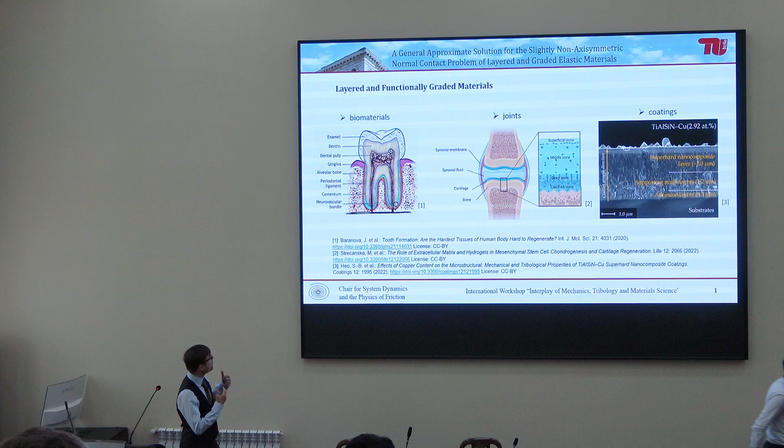So what do I want to speak about? Well, lots of materials aren't homogeneous for various tribological reasons. We put coatings to improve wear and friction properties. Nature designs materials almost exclusively in an inhomogeneous way because it's better mechanically and tribologically, and nature found that out a lot earlier than we did. So in teeth or in joints, basically any biomaterial is inhomogeneous—either layered or functionally graded. So what do we do with that?

We can do contact mechanics for these materials too. It's slightly more complicated, but we can do it.

I will now start with some fundamentals that Professor Popov skipped yesterday, because I have the time, and because I want to say a bit less than he told you yesterday.

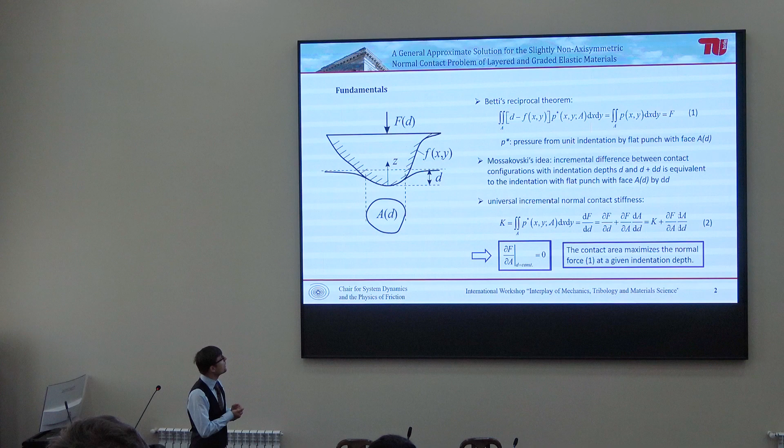When we look at some contact problem, it actually doesn't matter whether the material is homogeneous or inhomogeneous. It's just a linear elastic medium, and we indent it by some rigid body, and we will have some contact area. The interesting thing is that due to reciprocity by Maxwell and Betti, we can compare two contact problems with each other. The first is this convex, arbitrarily formed indenter, and the second is indentation by a flat punch with that same face.

So we have some contact area at this instant of the indentation—contact area A. Now we make a flat punch with exactly this face and indent that flat punch. It will have the same contact area because it's a flat punch, and if we press the flat punch, the contact area is always known. The pressure distribution in this second, imagined problem is P star. The pressure distribution in the real problem we want to solve is P. Due to reciprocity, we can calculate these integrals where we multiply the displacement times the pressure.

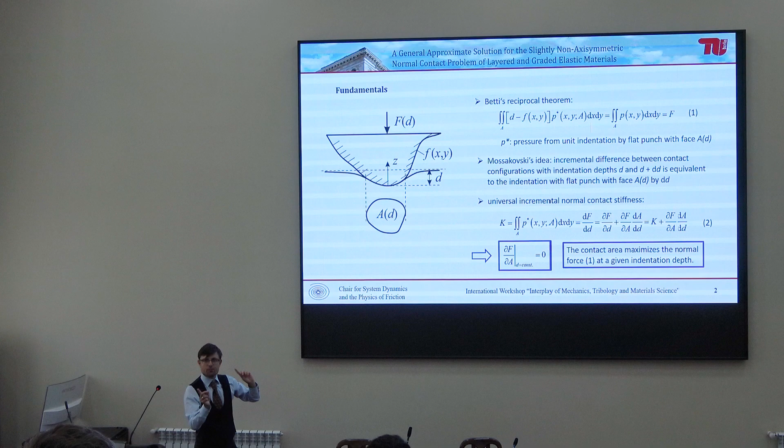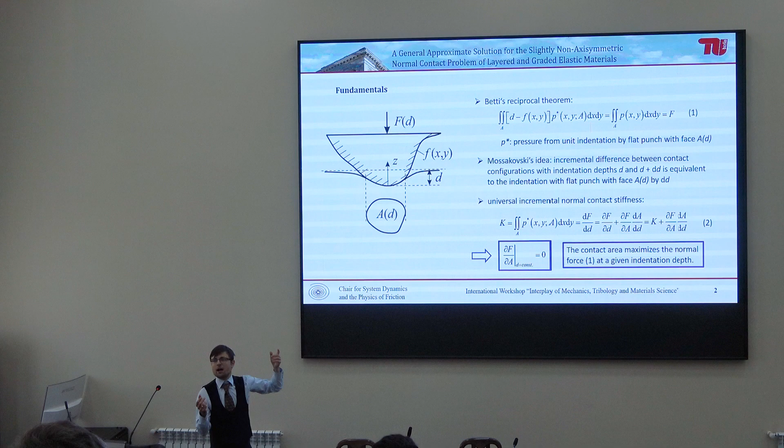If we integrate that, we get some energy functional, and due to reciprocity by Maxwell, these integrals on both sides must be the same. The displacements for the flat punch are constant because we indent it, and the displacement is always unity because we define the pressure distribution like that. So on the right side we just have the force, and on the left side we have some functional with the displacements in that problem and the pressure distribution P star from the indentation by the flat punch.

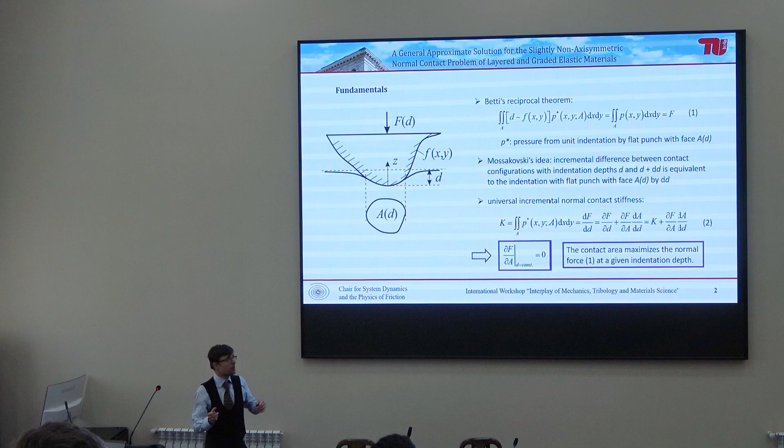So now there are some problems. First, we don't know P star because it's an arbitrary shape of the contact area, and we don't know the pressure that corresponds to it. But what do we know?

We know from Mossakovski, long ago, or as Professor Popov credited it yesterday to Jaeger—though actually the idea is older, Jaeger formulated it in a very elegant and capturable way. The idea is the following: we can understand the indentation process as one during which the contact area grows in some way.

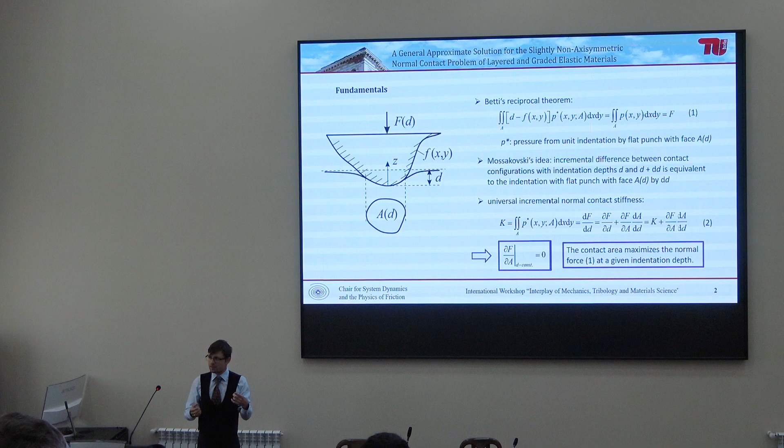We can understand it as a series of flat punch indentations with growing flat punches. And so the incremental stiffness at this instant for this problem on the left side with this contact area A, this incremental stiffness must be the same as the stiffness of the flat punch problem with this contact area. That stiffness is only the force for unit indentation.

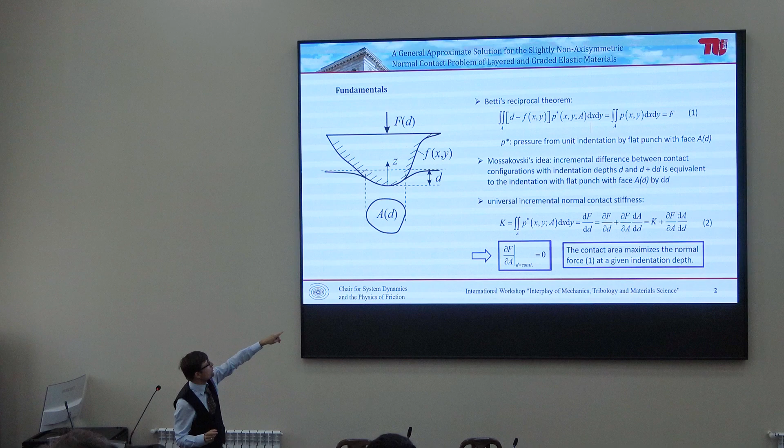So that is just the integral over P star, over the contact area. So this is the incremental stiffness K. But if we look at Betti's theorem, and we calculate the stiffness from there by building the derivative of the force with respect to the indentation depth, the total derivative, then we have the partial derivative and the chain rule. And the partial derivative of the force with respect to the indentation depth also is just K.

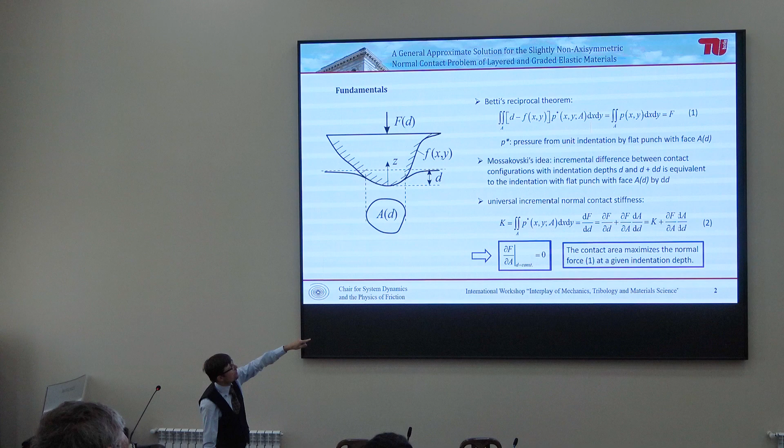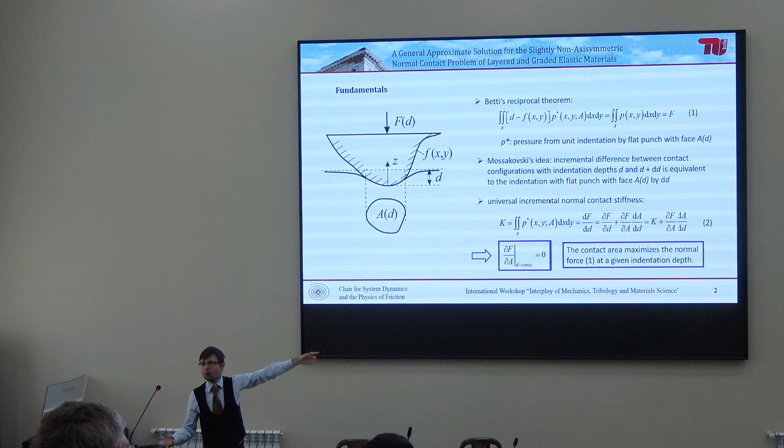And that means, if we look carefully, that the second term on the right side of equation 2, this partial derivative of F with respect to the contact area, this always must be 0. Because we have K on the left side and we have some K plus something, so this something must be 0. So, and that's the very important part.

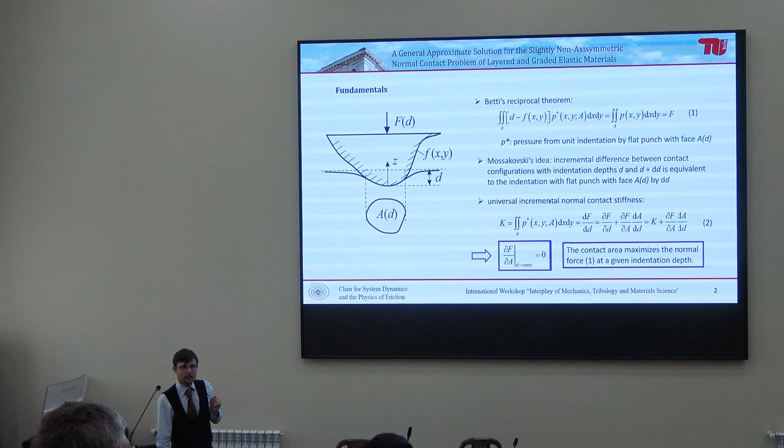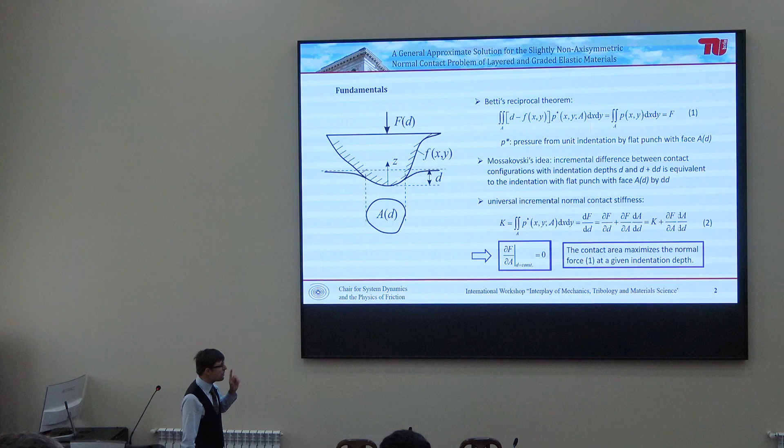What does it mean? It means that the correct contact area in any linear contact problem will always maximize the normal force at a given indentation depth. And that is very, very useful because it's the extremal principle of contact mechanics.

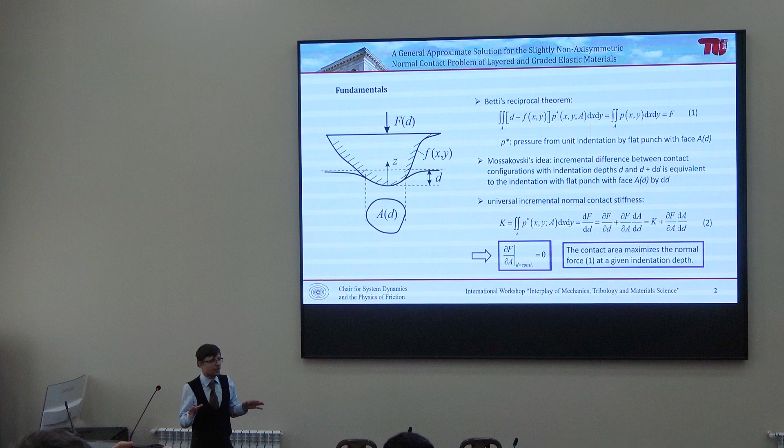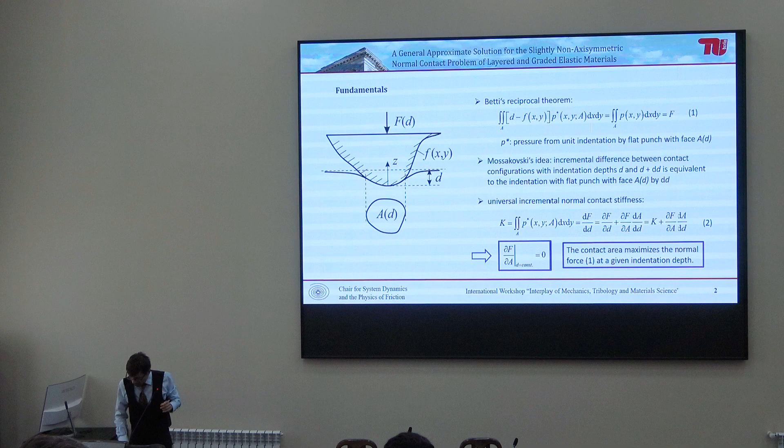We have extremal principles almost anywhere in mechanics, but mostly these principles are energy principles. That's a force principle. But that is the most relevant extremal principle of contact mechanics, from which we will derive a lot of stuff. So, we have to start with the flat punch.

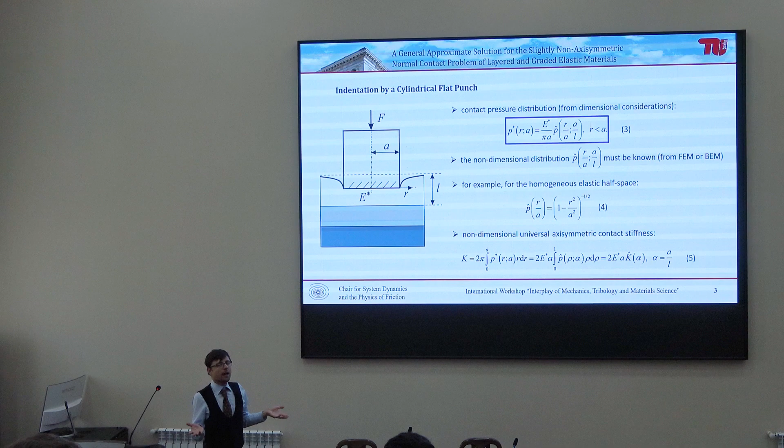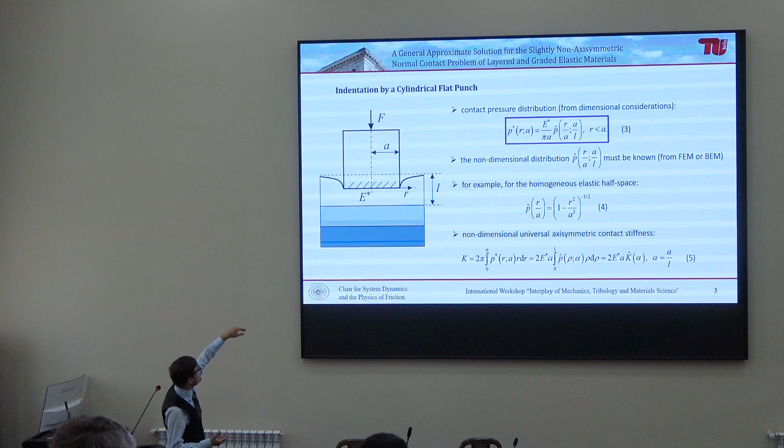And we will start with the most trivial problem, the cylindrical flat punch. And then we build up and up and up from here. So we have some inhomogeneous, for example, layered elastic material, and we indent it by a cylindrical flat punch.

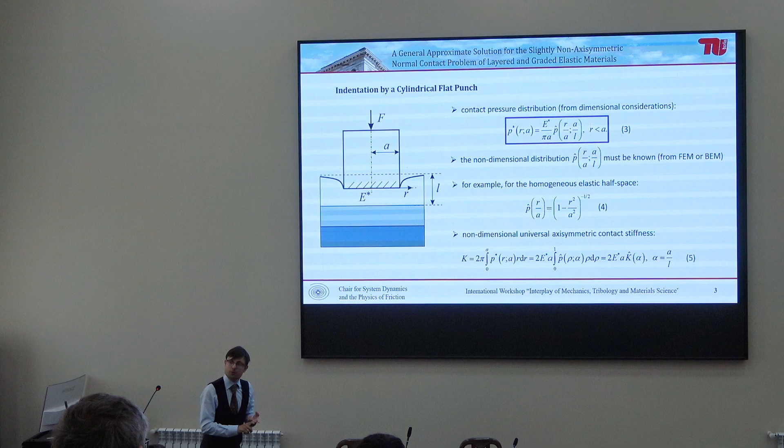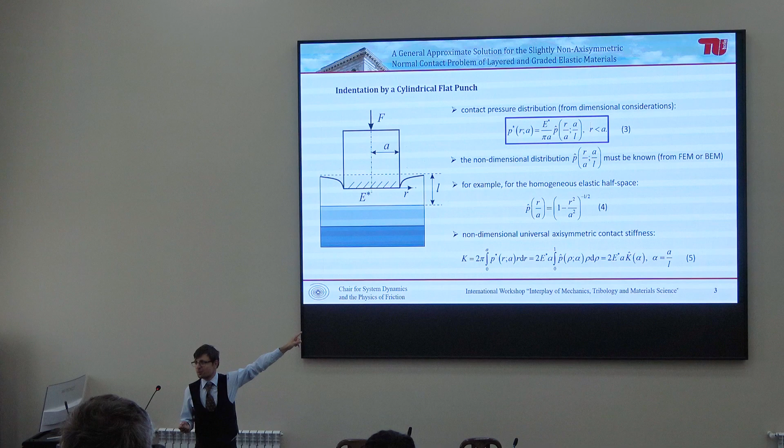And there will be some pressure distribution. This pressure distribution must be calculated somehow, either by finite elements or boundary elements. It doesn't matter, but we have to get it from somewhere. And the aesthetics and harmony of the homogeneous problem that Professor Popov told you yesterday about arises from the fact that for the homogeneous case, we know this pressure distribution in an exact form.

But generally, we don't know it. And generally, it's not even possible to calculate it analytically. But of course, it's always possible to calculate it numerically by some formalism. We have to put it that we know that.

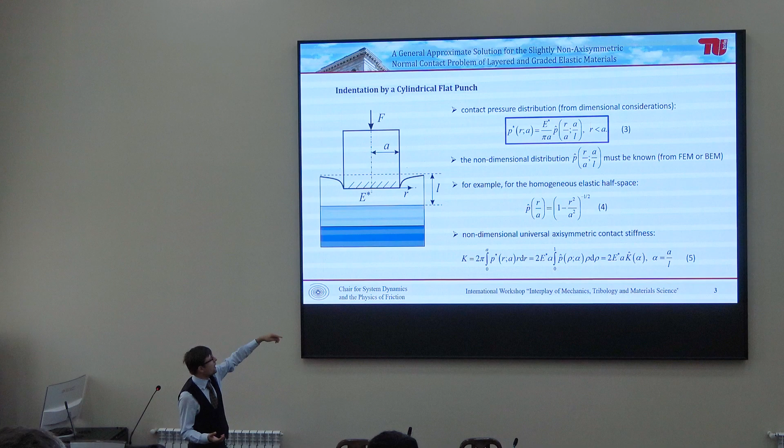It is tabulated in some way. And even if we know it analytically, from numerical perspective, it will just be some table. And we say, we know this table, either from literature or we calculated it ourselves. And then we can also define the universal axisymmetric contact stiffness for this inhomogeneous material based on this pressure distribution.

It's just the integral of the pressure distribution over the contact area. And this we have to put as known. And everything else can be derived from that.

That is the point. As Professor Popov showed you yesterday, there are different ways of superposition in contact mechanics. You can superimpose fundamental solutions, just point forces, or you can superimpose flat punch solutions. And this is what we will do. We will just superimpose flat punch solutions.

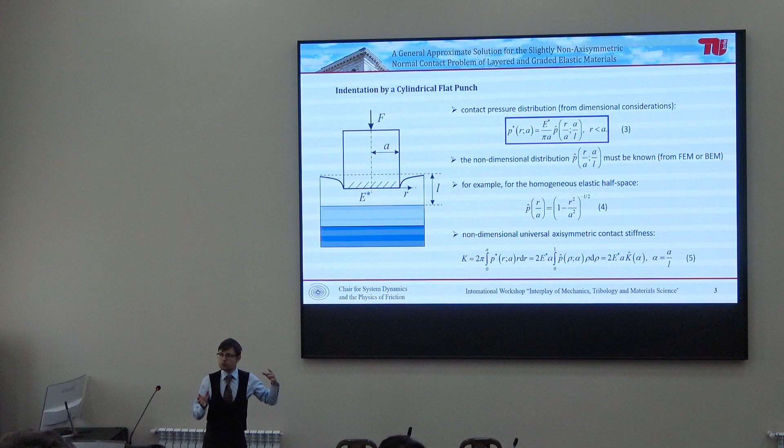But this solution we have to get somewhere. But if we have it, we basically have everything. From the axisymmetric flat punch, we can calculate from the extremal force principle the solution for the contact solution in the arbitrary axisymmetric case. That is also known for quite a while.

You might wonder why I'm not showing you springs when I told you in the beginning that I'm basically talking about the method of dimensionality reduction. Well, of course, one can interpret or translate these equations to the language of MDR, but I will just show you the contact solution, because the solutions are actually new, but one can always translate it to this formalism with springs and so on and so forth. But that's only, it's all the same. It's just a way of thinking.

So we can derive the axisymmetric solution. It's an exact solution, in closed form. Everything is perfect, everything is fine. And I want to put your attention to this integral transformation H.

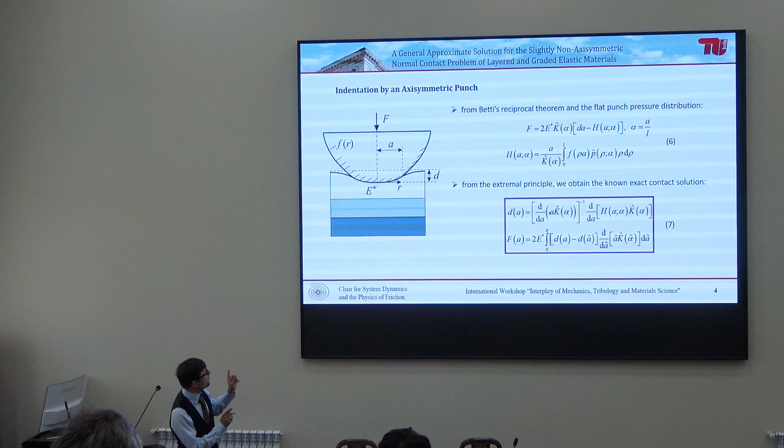This H is kind of the equivalent MDR profile. Yesterday Professor Popov showed you that the equivalent profile for the homogeneous case is just an Abel transformation of the original profile. Generally it's the transformation of the profile with the flat punch solution. And because in the homogeneous case the flat punch pressure is the integral kernel of the Abel transform, in the homogeneous case all profile transformations are Abel transformations.

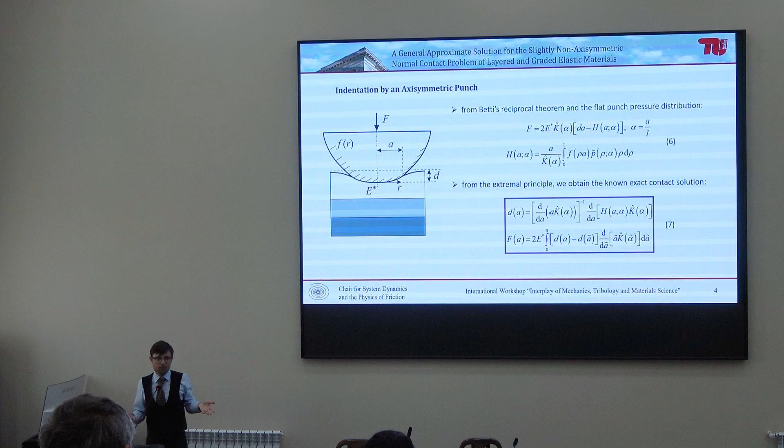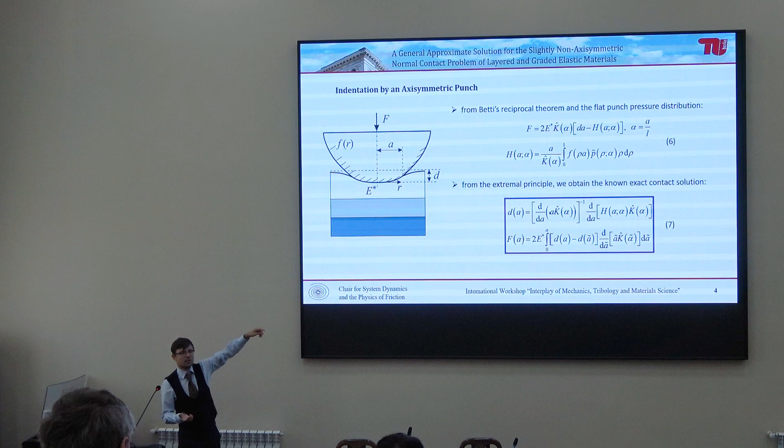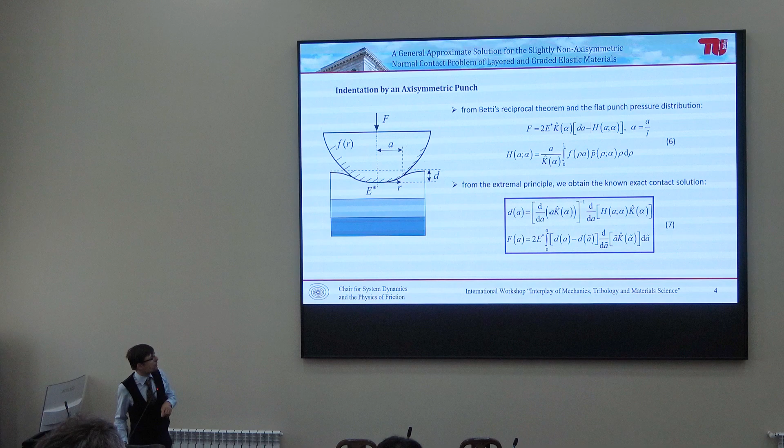In the general case, we have to transform with the pressure as the kernel, whatever the pressure may be for the flat punch. But that can be done numerically extremely easily, because it's a one-dimensional integral. If we have the pressure tabulated, we just calculate it. And then if we have the transformed profile H, we have the full contact solution according to the equations below.

So what do we do if the punch is not axisymmetric, but almost axisymmetric? Or, well, it might be quite general non-axisymmetric actually. But let's consider the case where it's almost axisymmetric.

We indent it, and there will be some non-symmetric contact area. Professor Popov yesterday showed you how all the solutions look in the homogeneous case. How will it be done in the inhomogeneous case? Well, first of all, we don't know the pressure under the arbitrary flat punch. We know it under the cylindrical flat punch because we calculated it, but we don't know it for the arbitrary case. To solve this problem, we do something very similar to what you have seen yesterday.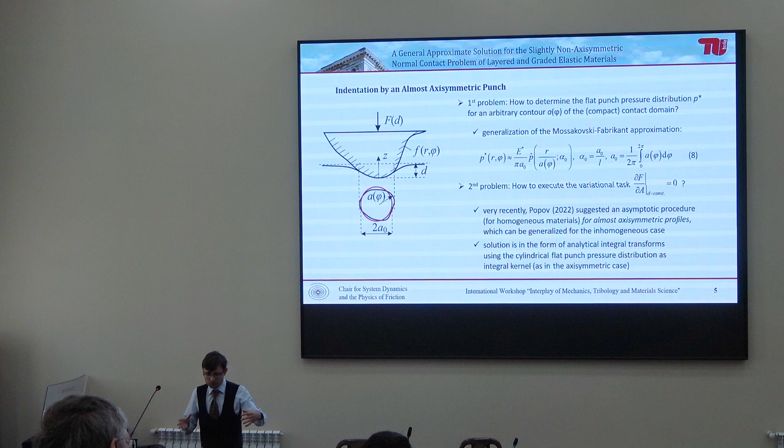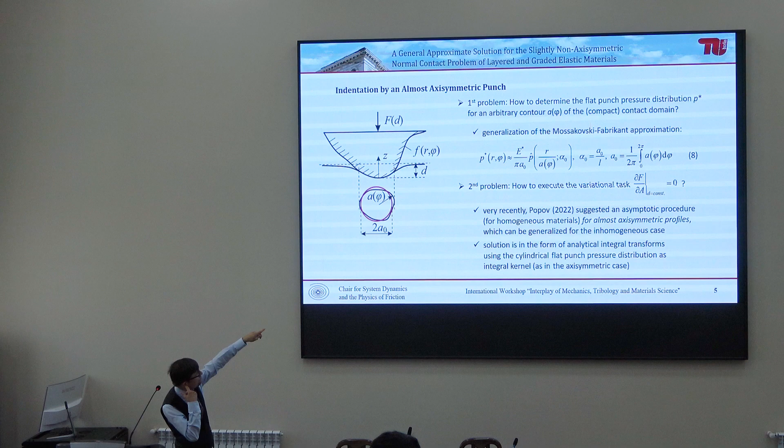We just scale the axisymmetric flat punch pressure to the non-symmetric contact region. That idea originates also from Mossakovski and Fabrikant. For the inhomogeneous case this has not been done before, but it's the same procedure. So we take the axisymmetric flat punch solution, which is this P with the hat, and then we just scale it to the non-symmetric contact area with the contour A as a function of phi. We just say it's like that, and it works very well actually.

The second problem is, how do we execute this extremal procedure? This variational procedure results from the extremal force principle. That can actually be done in completely the same way as Professor Popov did it in the homogeneous case. He didn't show it yesterday because it's quite an involved asymptotic procedure, but it's just mathematics. It's not magic. One sits down, writes down the asymptotics, and in the end there's an asymptotic exact solution.

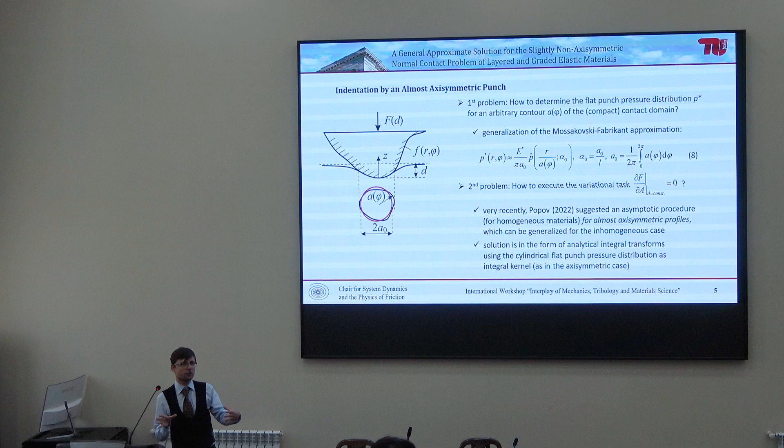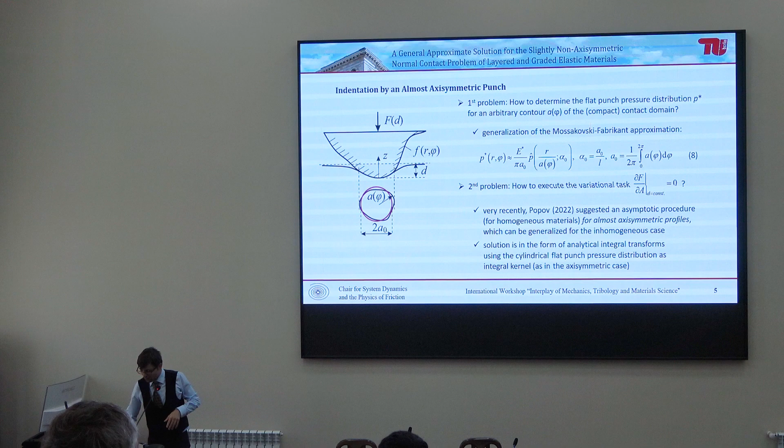The same way this can be done also for the inhomogeneous case. And then in the end we will have an analytic closed form solution for the asymmetric inhomogeneous problem in terms of basic integral transforms, using the cylindrical flat punch pressure distribution as the integral kernel. Similar to the axisymmetric case, similar to the homogeneous case, it all works out the same, only the equations are a bit more tricky in the inhomogeneous case. That's why I didn't write them down, because I don't want to bother you with boring mathematics.

We of course checked it with rigorous numerical simulations based on the boundary element method for a single elastic layer, because for a single elastic layer this pressure distribution for the axisymmetric flat punch is tabulated in the literature, so we can just take it. And we have a full, complete boundary element formalism for a single elastic layer based on the Fourier transform of the fundamental solution. So we have a rigorous numerical simulation, and we can compare our approximate analytical solutions to it very easily.

So first we consider the elliptical general Hertzian contact. We have an elliptical paraboloid in contact with one single elastic layer, and we look at the contact area. This is for an eccentricity of the paraboloid of 0.6. On the left-hand side we have the case of an unbonded layer, so the layer on the lower surface is just freely slipping.

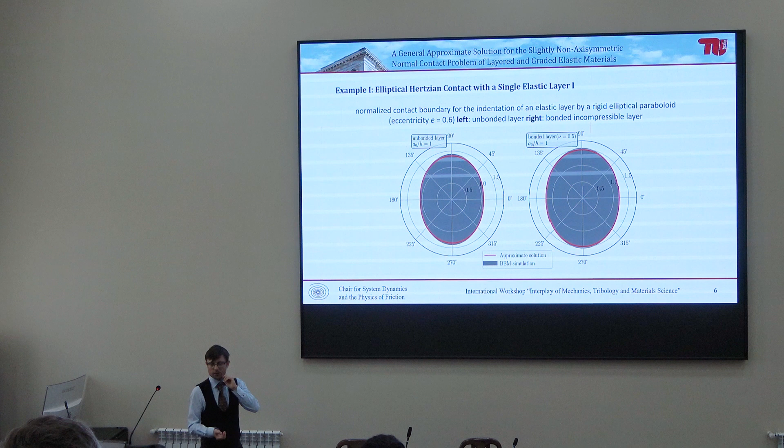On the right, there is a bonded incompressible layer. In gray, we have the rigorous numerical simulation, which takes quite a while, actually. And the red lines are the analytic approximate solutions, which have been derived. And it works quite well.

So now you can say, OK, that's one example. What do we take with that? So we did it for a lot of elliptical paraboloids. And the numerical simulations took like days, I guess, on quite a good computer. So what do we see here?

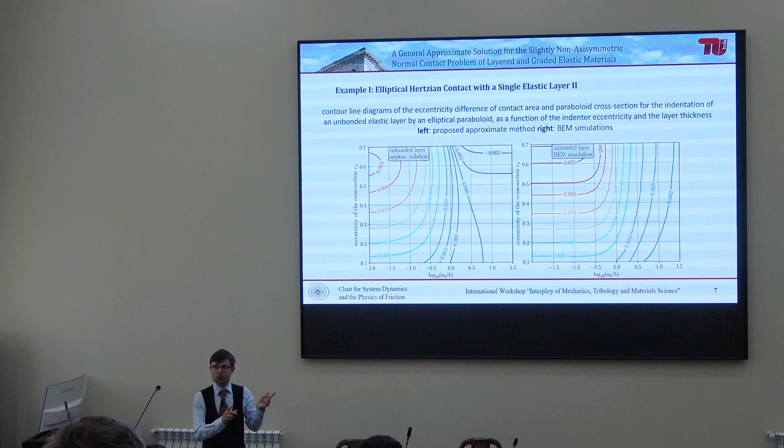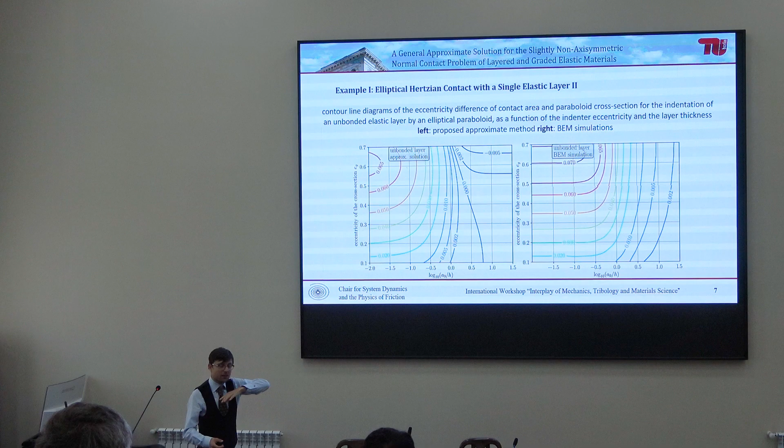These are contour diagrams of the difference between the eccentricity of the indenter and the eccentricity of the contact area. Because people who are well versed in contact mechanics know that in an elliptical Hertzian contact, the contact area is not just a horizontal cross-section, but the contact area is tilted slightly. That's why the eccentricity of the contact area isn't equal to the eccentricity of the body that we press in. And what we see here is the difference between these two eccentricities as a function of the eccentricity of the indenter and the thickness of the layer.

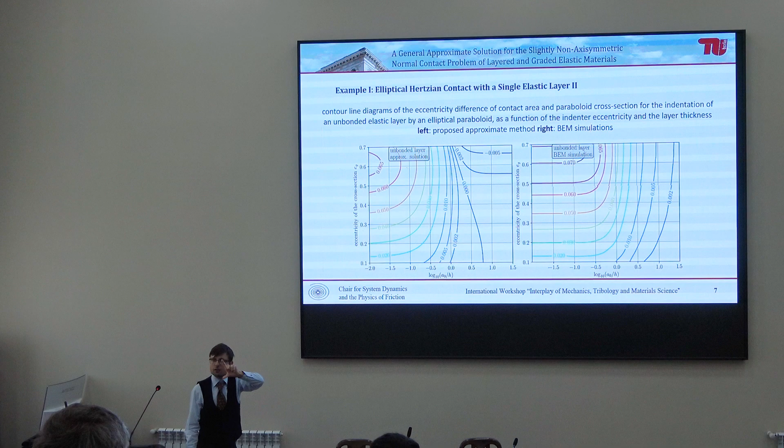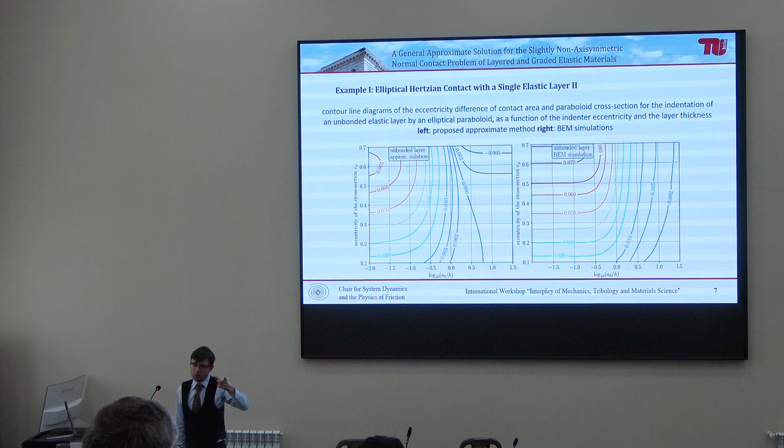If h, the thickness of the layer, is very large, on the left-hand side, we have the solution for a half space. And on the right, there will be the asymptotic solutions for a thin layer. On the left-hand side, we have the approximate solution. On the right-hand side, we have the rigorous numerical simulations. And that's already for the solution for the difference. So if you paint it in that way, it will look basically the same.

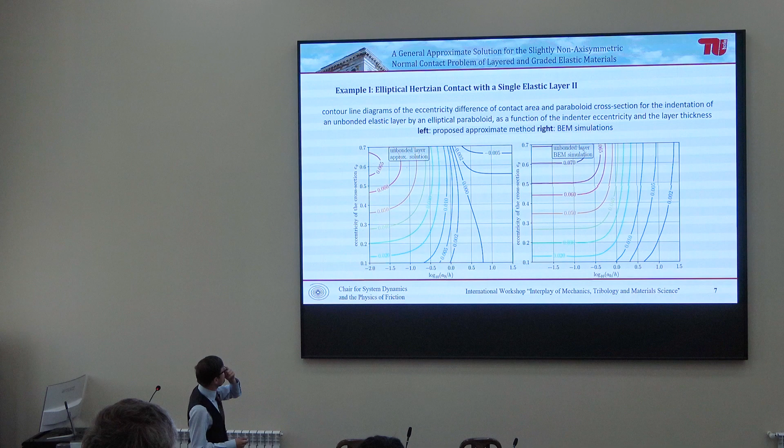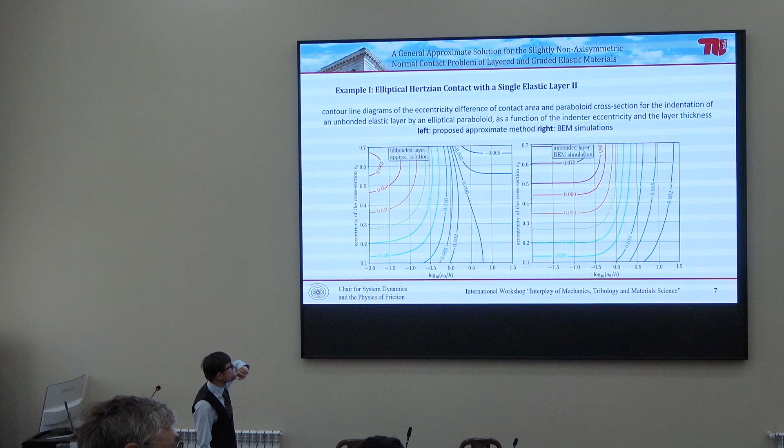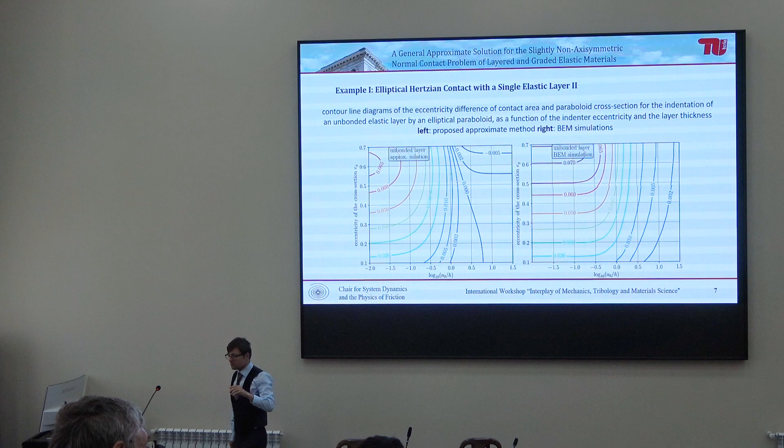But we can actually estimate the error of the approximate solution here. For example, negative values for this difference are impossible for physical reasons. And of course, in the numerical simulations, there are always positive values. So the error for the difference is approximately 10% maximum. That's the accuracy that we are working with for the approximate solution. So it's a relative error of approximately 10%.

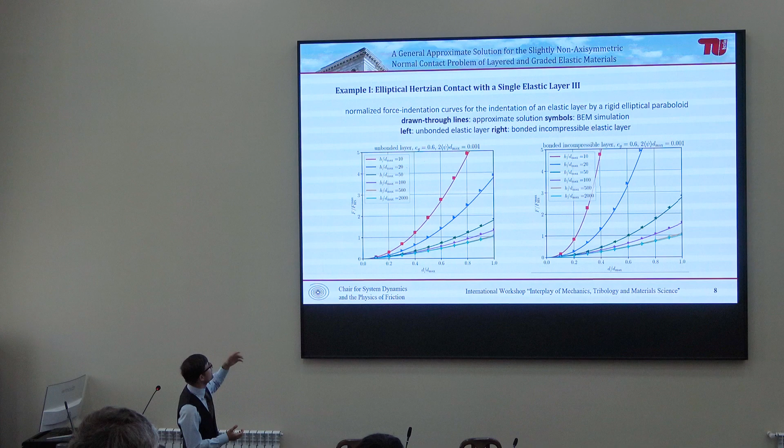Here we have force indentation curves. And well, that is working very well. If you remember correctly from yesterday, these force indentation curves are actually obtained by just averaging the profile to make an effective axisymmetric profile. And then you take just the exact axisymmetric solution. And this works just very, very fine for various values of the layer thickness. The symbols are the BEM solutions, and the drawn-through lines are the approximate solutions.

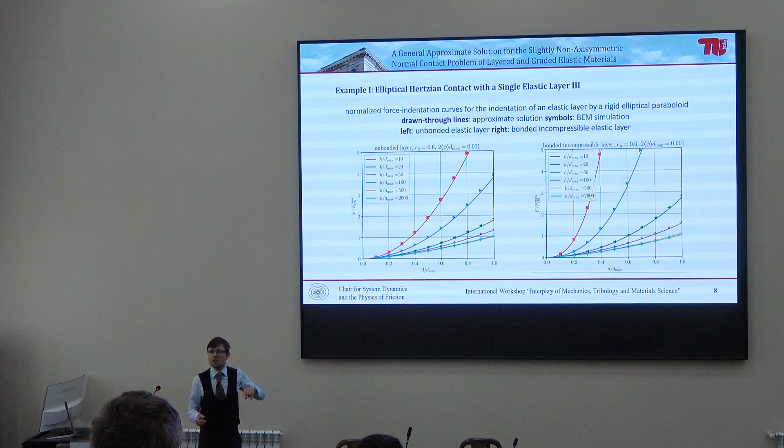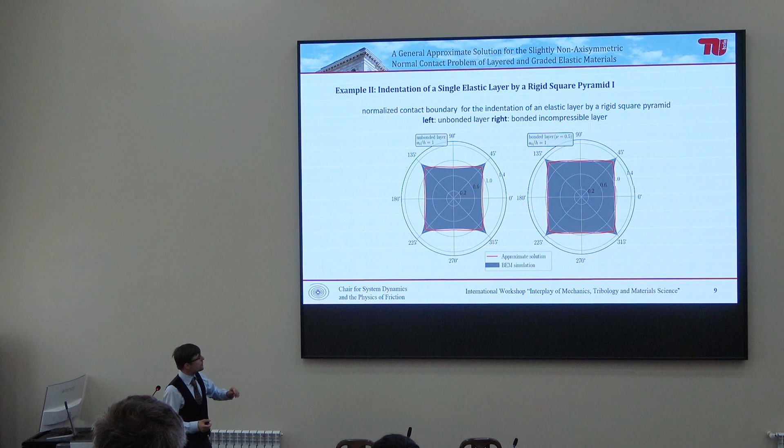Now the same thing for a square pyramid. So we indented the elastic layer with a rigid pyramid with square plan form. Here we have again the contact area for an unbonded layer and the bonded incompressible layer. In red, the approximate solution. In blue, the rigorous numerical simulation. Works very fine, especially for the bonded layer. But yeah, that's no coincidence. But I won't explain why. It takes a bit of time.

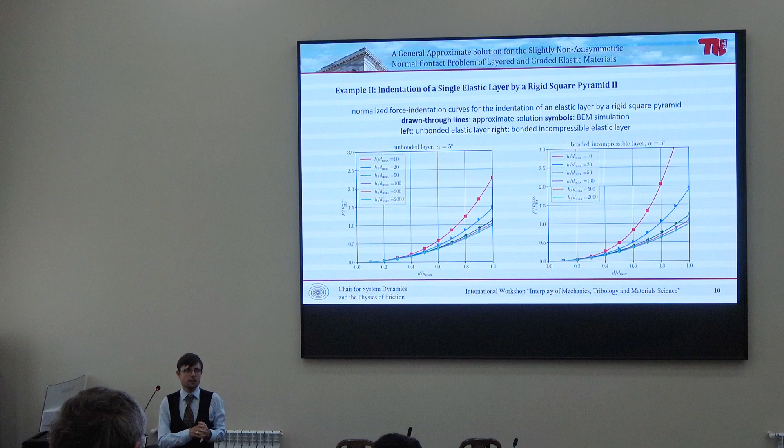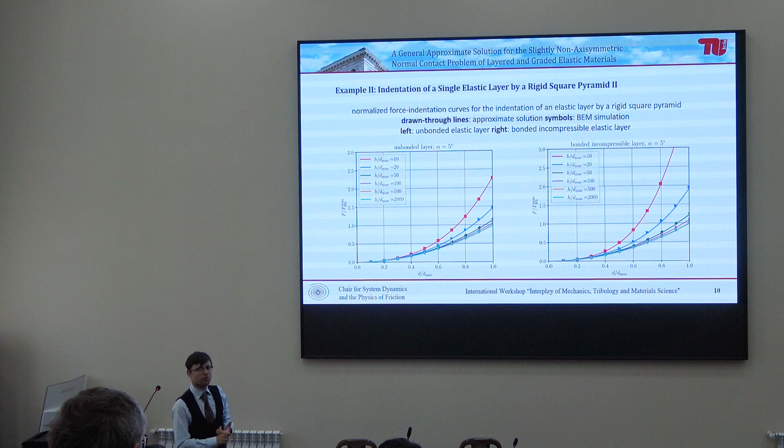And here again, we have force indentation curves for the indentation of a single elastic layer by a rigid pyramid. And yeah, you see that for the global contact quantities, forces, and indentation depth, the approximate solution works just perfectly.

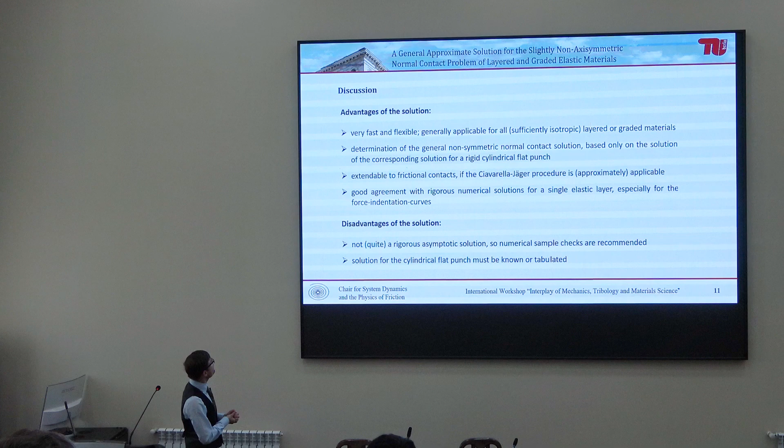Okay, what have we obtained? A very fast and flexible analytic approximate procedure to solve contact problems for linear materials, which is generally applicable for all layered or functionally graded materials, provided they are linear, of course. And we can determine the general non-symmetric normal contact solution based only on the known solution for the cylindrical flat punch. It can be extended to contact with friction.

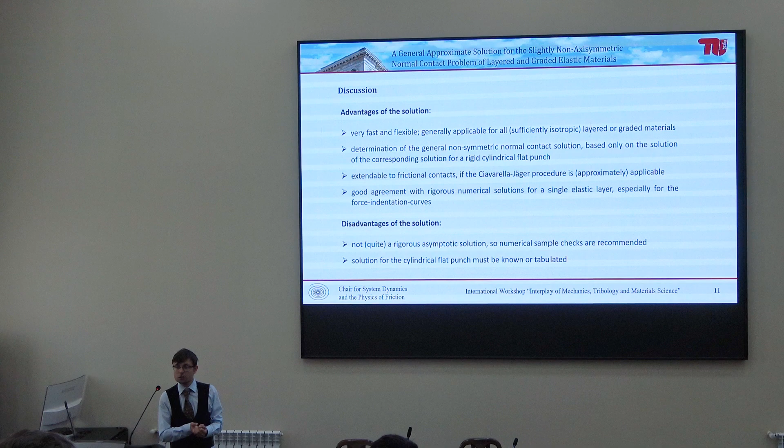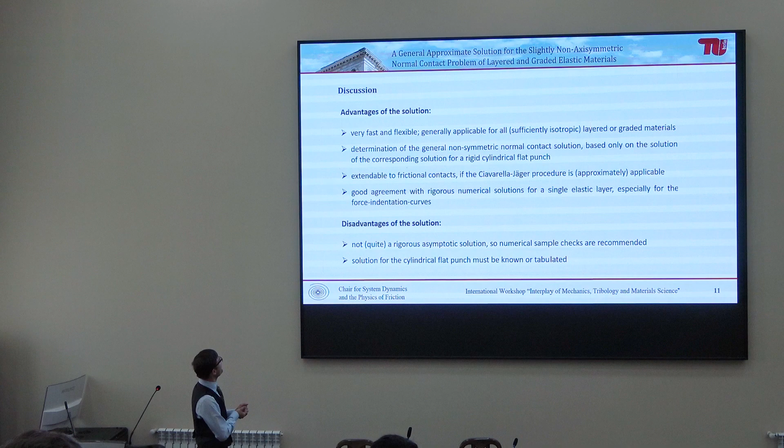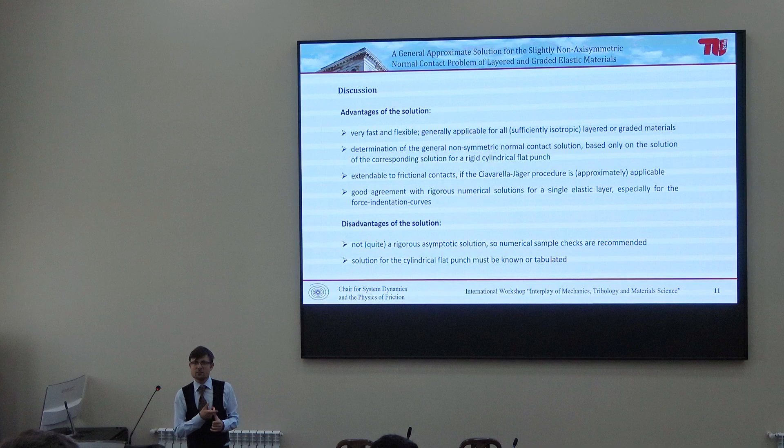If this reduction procedure of the tangential contact problem to the normal contact problem is applicable, which is basically always in some sense, we have very good agreement with rigorous numerical simulations for a single elastic layer, especially for the force indentation curves. The problem is it's not quite rigorous, so numerical checks are always recommended. And the solution for the cylindrical flat punch must be known.

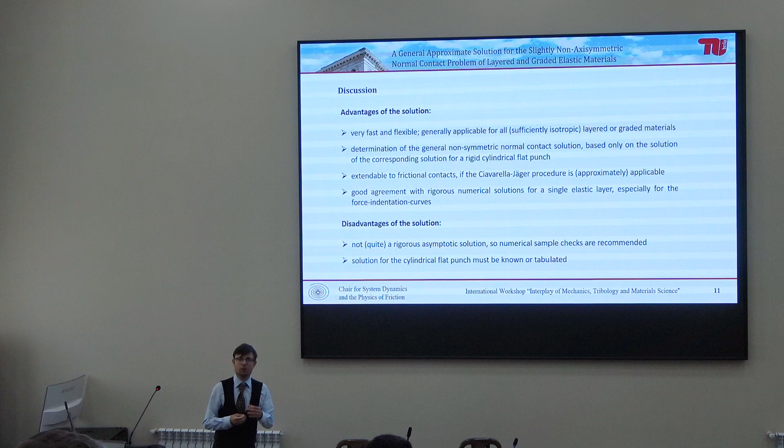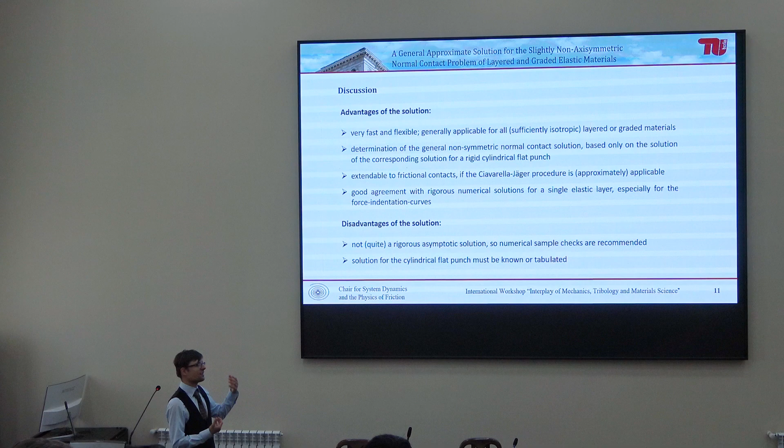So the aesthetics and harmony of the homogeneous case, as I said, lay in the fact that the flat punch solution in the homogeneous case is known, and now we have to get it somewhere. But actually, the aesthetics kind of remain the same.